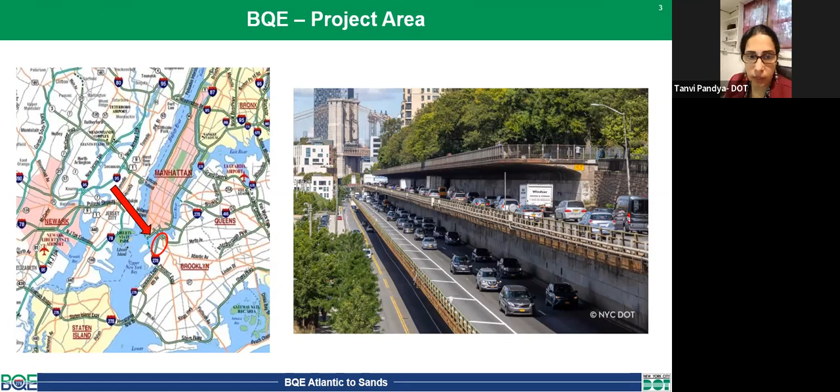We've met in the past. We've spoken several times about BQE in various forums. I think I've seen some of you before. So we're happy to restart the conversation. Like Julie said, for today, we're focusing on the immediate term work, specifically around this triple cantilever area.

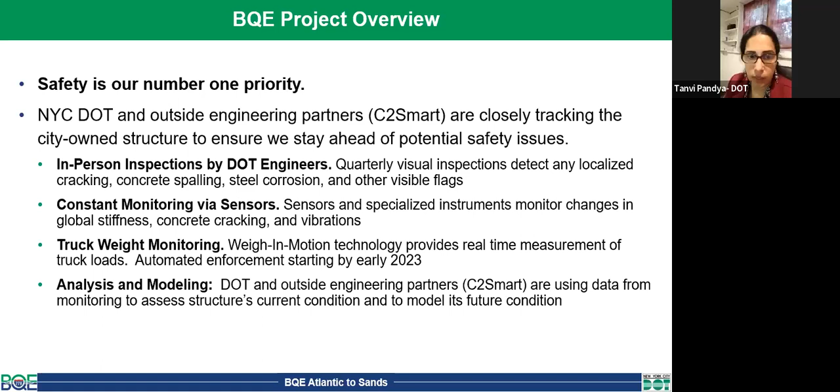While we've had a little bit of time that we haven't talked actively about the larger project, we have not been sitting back. Obviously, we've been keeping safety in mind. We've been monitoring the structure. We have quarterly walkthroughs done by our consulting team, including our in-house teams, to make sure we're keeping our eyes on the structure. When we identify any area that needs further investigation, we have follow-up effort that continues. We also have monitors that we've installed on the structure. And then on top of that, we have the WIM, the weigh in motion technology that was installed in 2019, which tells us exactly the kinds of loads that are on the structure.

So we take the data points. On one side, we have the condition of the structure and what it's able to carry. And on the other side, we have just how much weight we have. The combination of the two is what we look at to figure out the timeline for various repair work in the near term, and then setting the timeline for the longer term.

So we've also been partnered with C2 Smart, which is their academic... Tanvi, you're breaking up a little bit again. I can try coming back if you don't mind. Sure, why don't you do that? Okay. Sorry about this, folks. We'll be hopefully back online in a second.

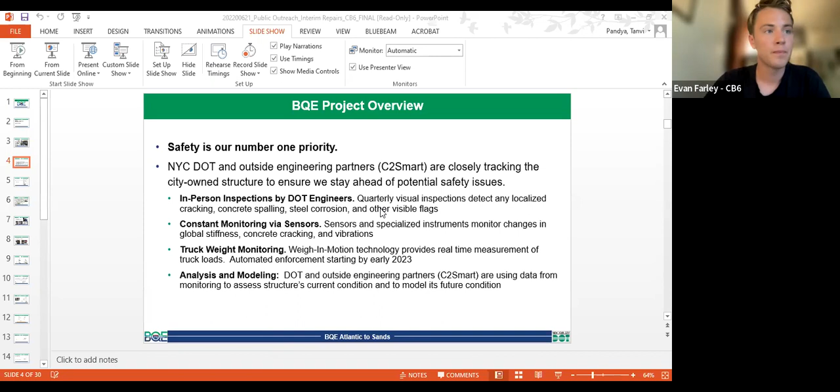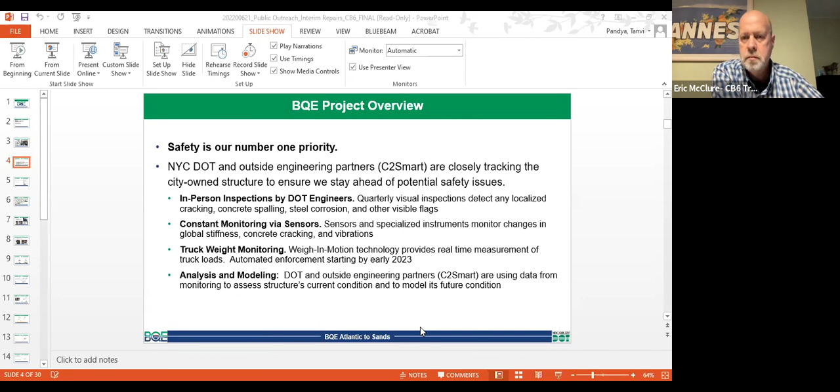Tanvi, do we have you back? Let's give her another minute, but then we might ask one of you guys to jump in. Yeah, it looks like she's joining by phone. If she can only do audio, I can share my screen and she can walk us through it. She's on the attendees, so she can't speak. If we can make her a panelist. I upgraded her, talking should be permitted, I think she's just muted now. If it's the 347 number. Yep. Tanvi, you're connected but muted on the phone. How about we go now? Hear me? Yes. Yep. Yes, great, sorry about that. Okay, back to the regularly scheduled program. Tanvi, if we have an issue? Okay, great, no it's sorted out. Okay, thanks everyone for your patience. Appreciate it.

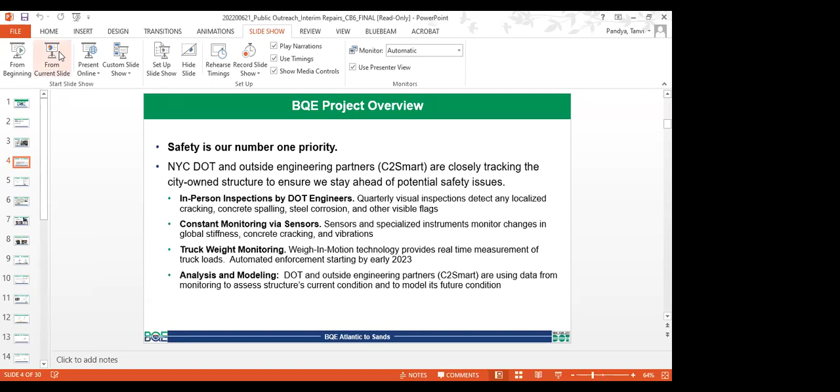Right, so we were talking about the truck monitoring that we've been doing. You've heard that we got the legislation approved, and we'll be looking to do automated enforcement in early 2023. In the meantime, we're doing the analysis and modeling that tells us where the structure is today and where it'll be down the line. We're partnered with the academic institutions of Rutgers and NYU, who are helping us think these things through using some cutting edge tools to do that.

Back in 2016, when we spoke about the condition of the structure, we said if by 2026 nothing is done, we would have to consider weight restrictions. We tried to identify what locations are causing that 2026 timeline to come up, and just like any chain is only as strong as the weakest link, we've now identified the two weakest links: near Clark Street on the Queensbound Roadway deck, and at Grace Court, also on the Queensbound Roadway.

In addition, underneath when you're driving along Furman, there's that vent structure for MTA that goes under the BQE, with an area inside that needs repairs. Since it's only accessible from the Queensbound roadway, while that roadway is closed for other repairs, we'll address that interior condition. Lastly, inside Joralemon, where those roll doors are, there's a structure we'd like to address as well. All of this work will come out as a combined contract later this year.

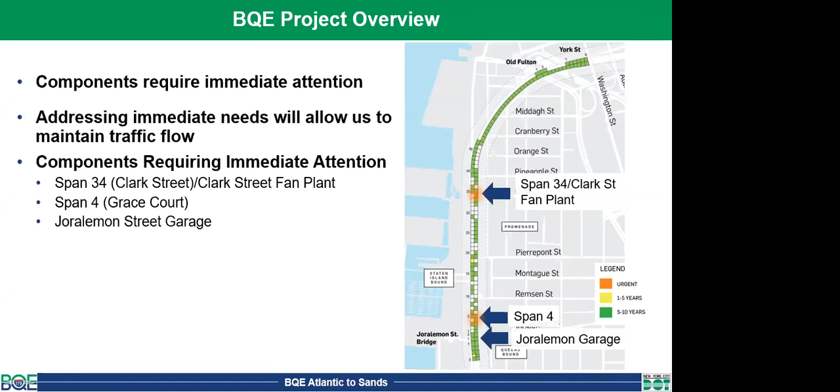So just looking at it from another direction, again nothing to do with the promenade, it's purely on the Queensbound roadway. The rough cross streets would be Clark and Grace.

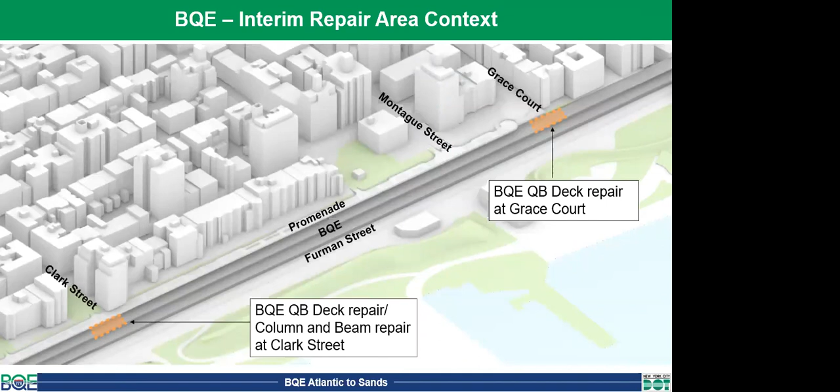This is something we have to work with MTA on. It has no impact on subway service or anything like that. It's simply that we're in the vicinity of their equipment, so we have to coordinate with them and make sure we do it in a way that doesn't disrupt anything.

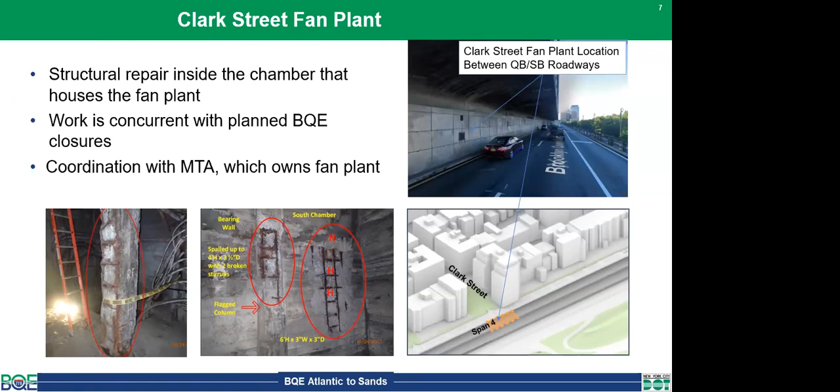And then this Joralemon work—the reason I'm focusing on these two tasks is that we're going to dig deeper into the deck repairs next. I wanted to get these two out of the way because they're relatively straightforward as far as the community is concerned. This work will be interior to this chamber you see, so there won't be too much visible outside, and it doesn't require any closures on the roadway. It's just work that needs to happen inside that structure.

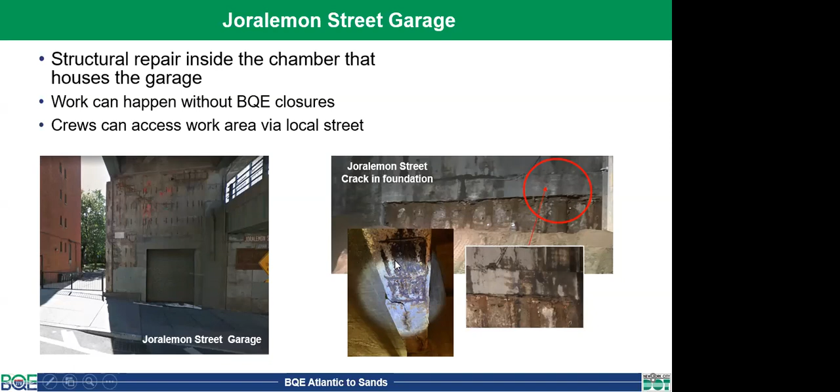There's a structure that has a crack we would like to repair, and some other beams that need to be repaired. So that's happening in the background.

The more important work that will be more visible and requires more traffic management is what's happening at the Queensbound roadway. Directly adjacent to the joints is where you can see it visually as you're driving by, where there's much more deteriorated concrete.

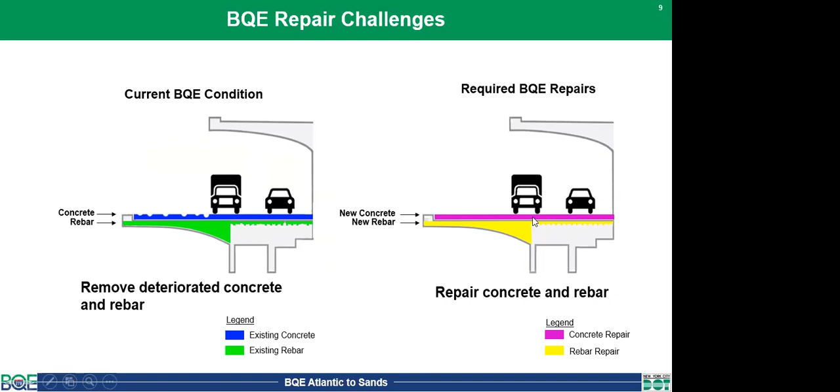Before we can do the repairs, we have to remove a lot of the concrete directly adjacent to the joint. Roughly 2 feet from the joint, there will be much heavier repair required. We remove this deteriorated concrete, then place new rebar to add strength to the area, and then place new concrete. That's the repair directly next to the joint.

As we go a little further in from the joints, the repair gets a bit shallower. We remove the upper level of concrete, replace it, add some rebar there as well to add to the capacity, and then pour concrete.

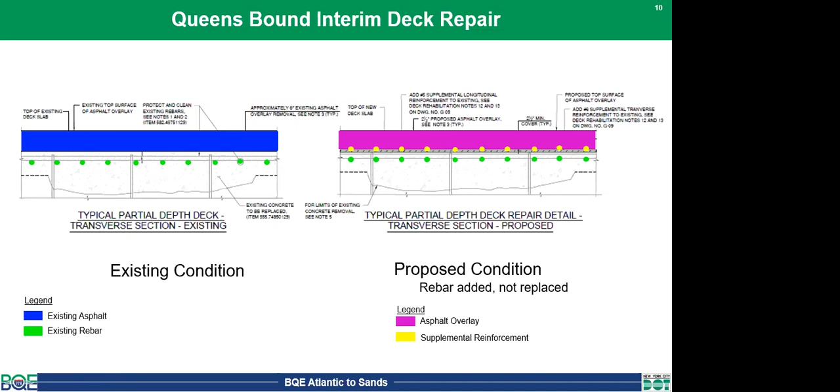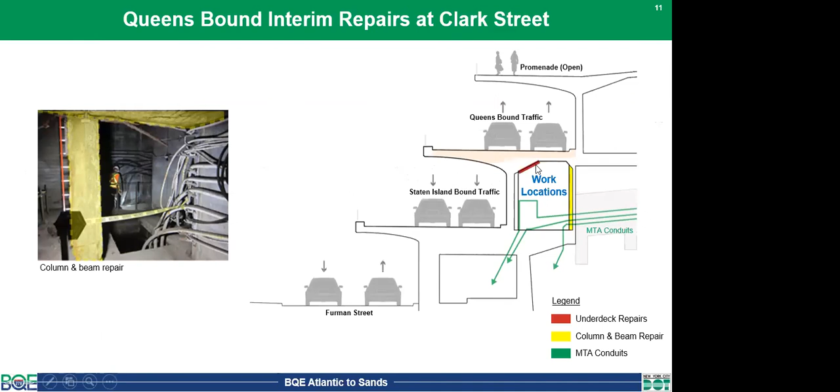As you might recall from past conversations, we need to work across all 3 lanes for this repair to really work. So when we come back to put this concrete back in is where we'll be looking for some closures. I'll walk through the closures in more detail, but while that work up above is happening on the deck, there will be work inside in this red area and the yellow column you see on the right.

The way the work is staged, there is a lot of prep work that needs to occur. There is demolition of the concrete that has to happen. This will occur during overnight hours, just like we do now, roughly from 1 a.m. to 5 a.m., then everything is back open. There will be overnight closures where work will occur. Plates will be put over the area under construction, and then we come back the following night and do it again.

When there is work underneath this cantilever portion, just to be safe and not put any traffic underneath live construction, we would likely close this lane as well. But it would be 1 lane in each direction at most during those overnight hours. The rest of the day, everything is back to the usual configuration.

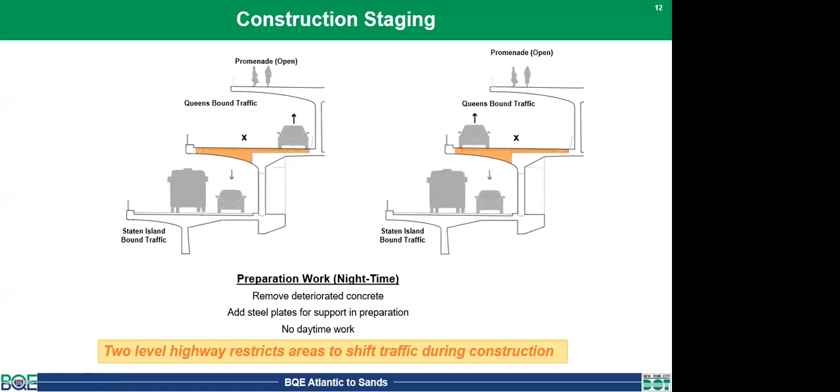After prep is complete, there will come a weekend where we are ready to put new concrete back, and that's when the first weekend closure will be necessary. This closure would be Saturday morning, 2 a.m. to Monday morning, 4 a.m., to allow us to place this concrete. When the concrete is wet, it needs to be held up by a support system sitting underneath it on the Staten Island bound roadway, which is why we're down to 1 lane in the Staten Island bound direction, with all lanes closed on the Queens bound roadway.

Once the concrete has cured sufficiently that we can remove this support structure, we will remove it. Staten Island bound roadway would then be open, and Queens bound roadway just needs sufficient concrete cure time for the repair to hold. So this is the window we'll be allowing the contractor to work in. Obviously we will encourage them to finish quicker and get out, but this is the window by permit that they will be allowed.

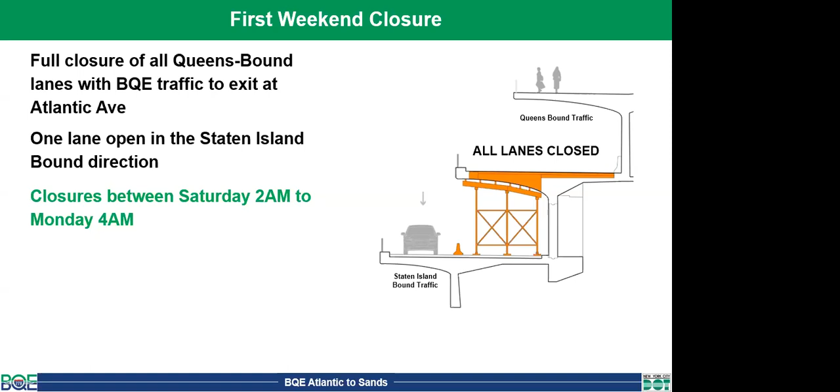After the work nearest to the joint is completed, for the subsequent 2 weekends there would be just prep. Then there will be another weekend where we do a pour, some more prep, and then the last weekend where we do a pour. Those subsequent 2 weekends we would only have Queens-bound roadway closure. Staten Island-bound would be completely open.

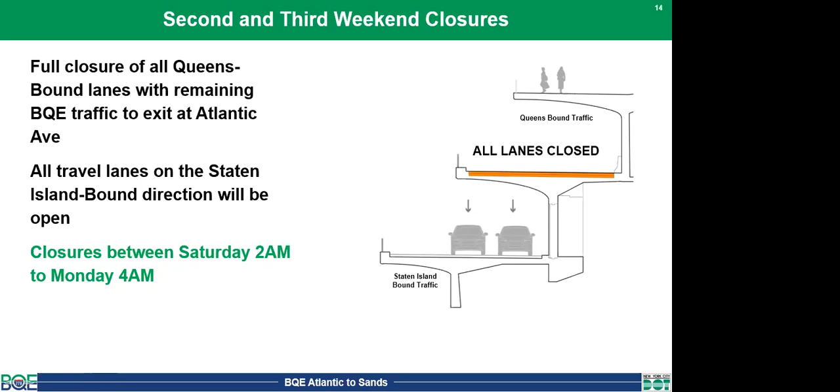These weekends are spread out over the construction season. We're very carefully trying to find the 3 weekends where there isn't any other major activity happening—no major holidays, no planned events, and so on. It's being very carefully thought through on how to do it to not have issues regionally, because anything that happens to BQE does tend to impact regional traffic, as well as greatly impacting local traffic. So this is the summary of the kinds of closures we're talking about: prep initially, first weekend closure, prep some more, second and third weekend similarly.

In order to achieve this, we have to close all of the entrance ramps where traffic is coming onto the Queens-bound roadway and send them on detours way outside of the downtown area and immediate vicinity, to avoid having a clogged up local network for the people that have to use that area. So we'll try to send the regional traffic completely away from the area, and then try to improve conditions for the local adjacent area.

This will take several traffic enforcement agents. We've been working closely with PD to make sure we have the number of agents we need. We'll also have many pedestrian managers, realizing that this is during the summer months where people are out and about, so we need to manage the pedestrians and keep them safe, as well as keep the traffic moving. There'll be message boards all over the place.

In addition, we are talking to our regional partners—New Jersey Transit, Turnpike Authority, Thruway Authority, Port Authority, MTA, and so on—to try to encourage the public well in advance to just avoid these weekends altogether for this area, and on that weekend, encouraging them to use alternate routes. We'll also do outreach to freight and try to work with them to avoid the area altogether. We'll also use the HOV configurations, the ones we have in the AM hours, to direct more traffic towards the Battery Tunnel rather than coming into the Brooklyn Bridge and Manhattan Bridge area. So there's been a ton of planning that has gone into this to try to minimize it to the extent feasible, understanding that any closures on BQE are obviously very disruptive to the neighborhood.

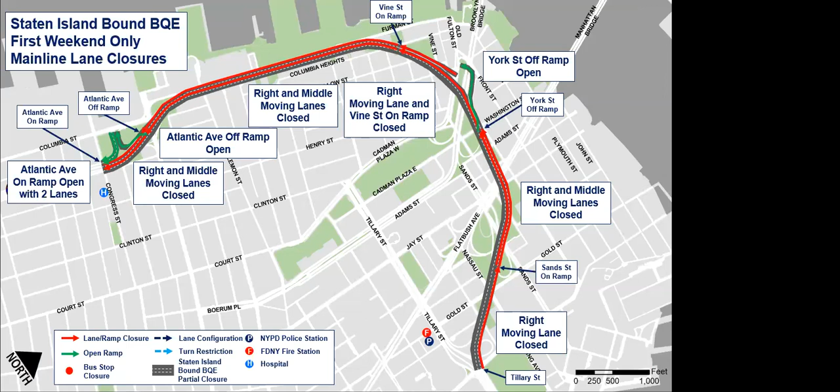So this is just sort of a close-up of all of the on and off ramps that are closed. Again, when we come back closer to the construction, we'll have more detailed information, and certainly different areas will need more details on different aspects. So this is sort of a high level of everything.

So in order to make this Staten Island bound detour work, Furman Street going towards Brooklyn Bridge is going to be closed. It'll be 2 lanes going towards Atlantic so that we can move most of that traffic through. That's one noticeable change that helps us keep the traffic moving. And this is why we'll have a lot of pedestrian managers in the area, because of the people coming in and out of the park.

And then there's a bunch of smaller turns that we have to modify to make sure traffic keeps moving. For the Queens-bound roadway, the closures are a little bit more extensive. The on-ramps are going to be closed further back to the south in order to reduce the amount of traffic that comes off at Atlantic, because anybody on that roadway at Atlantic has to get off.

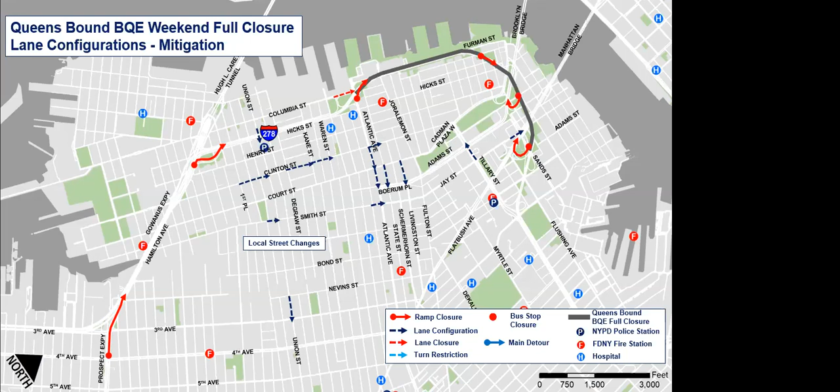So we'll try to encourage people to get to the signed detour routes well in advance and not come all the way to Atlantic and then try to find their way around. There will be some local street changes, knowing that some of the local traffic that comes off these streets around here has no option but to go through and will need to be managed. There will be some turns that are limited, some parking limited for the weekends to allow for storage as turns have to be managed. We're also going to be limiting some turns—certain left turns that tend to slow down everything.

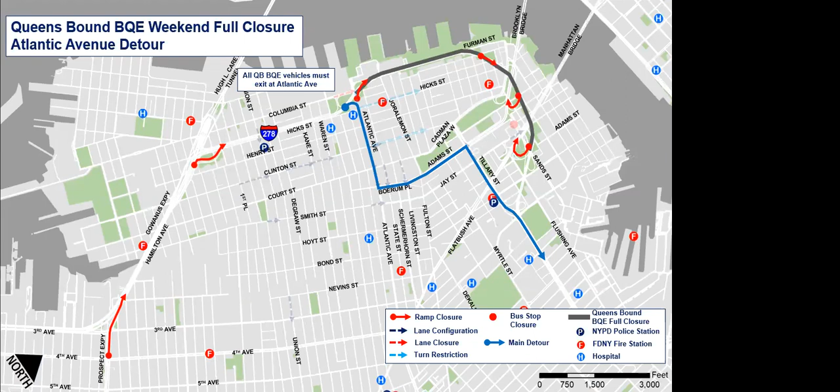So we'll be managing around those kinds of things and try to keep people on mapped routes. If someone came all the way to Atlantic and that's where they get out, we'll have to get them through Boerum to Tillery. But preferably, we will get them out of this area altogether, and they'll be coming along Third and then back on further down.

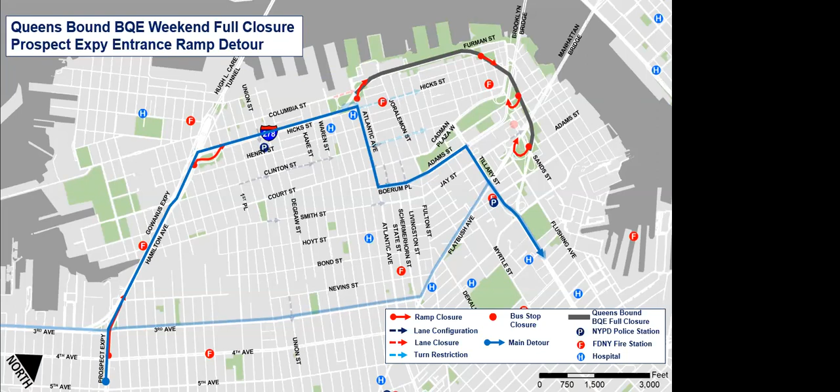And then again, there will be some that come from Prospect Expressway that we do have to manage through this area, and they would also be using the Boerum to Tillery. So these are the two marked detour routes that we'll be managing.

In addition, specifically for freight, these are some of the ramps that we're closing. For the freight, we are going to be encouraging them to use Linden Boulevard to go directly towards the airports, since at least some of them are headed that way, to try to keep them out of this area altogether. So that's one of the communications we'll be having with the freight industry.

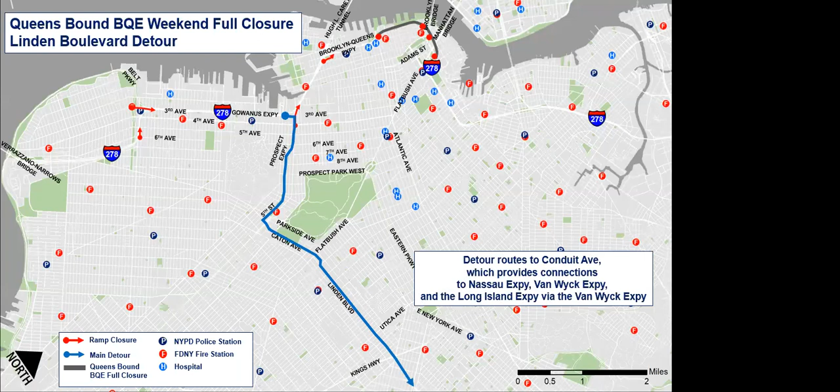And then, of course, if we are sending people to either Battery Tunnel or to Manhattan Bridge, we need to make sure that that traffic is able to get off and continue moving in Manhattan. Otherwise, everything backs up back into Brooklyn. So we're also making some modifications on the Manhattan side.

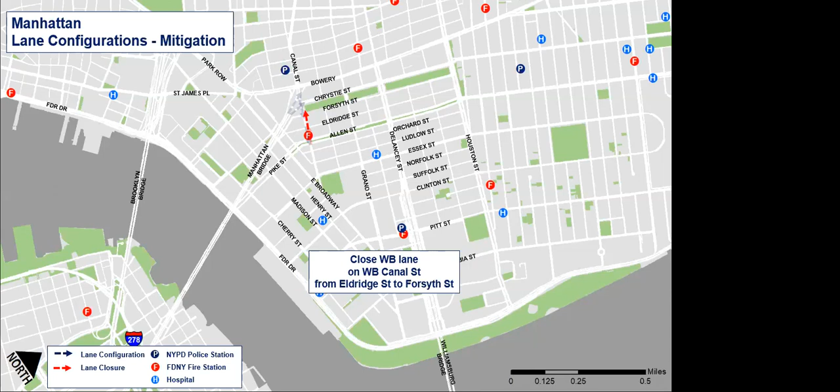And again, this is an area where we will have both TA and pedestrian management to make sure traffic taking Manhattan Bridge can get out. So people headed into Manhattan will be encouraged: if you're coming from the south, use the Battery Tunnel; if you're coming from the north, use the Manhattan Bridge and avoid this section of BQE.

So where we are in this process is we're just about finished with all of the contractual documents. We're looking to go to advertisement shortly to bring a contractor on board. And then there's some paperwork and registration involved, which will finish out towards the end of this year, and that's when the contractor will have the notice to proceed to get started.

And at that point, they have to give us an exact schedule of how they plan to proceed with this work. As soon as we have that, in early 2023 is when we will be able to come out and give you more specifics of which weekends we anticipate doing these closures. And then they'll be held to meet that schedule.

And obviously we have to keep in touch with you about the larger schedule, but we'll also have a specific community liaison who will have a phone available 24/7 throughout the construction duration to quickly respond to any issues.

The weekends that we do closures, we're going to have not only our people out there, we'll also have consultants who will be monitoring various areas and sharing that with our traffic management center that can give us directions if something needs to quickly change. And the contractor would also be able to implement those changes quickly if it's necessary. So there's a lot of that coordination that will be occurring during those weekends.

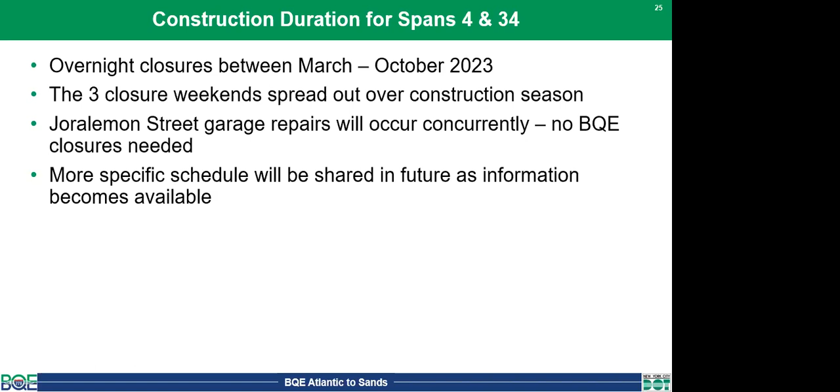And we'll identify who that point of contact is so that everybody can quickly reach someone if something comes up. So with that, I can take questions.

Tanvi, thanks. Karen, I know you posted a question in the chat. Tanvi, do you want to take that one first? And I'll just read it, Tanvi, in case you can't see the chat.

It says: it sounds good, but what are your plans to handle traffic if your encouragement just doesn't work? Tanvi, I think you spoke a little bit to this in showing the detours, but can you talk a little bit more about the traffic calming measures to actually direct people towards the detours?

Yes. So we will definitely have well-marked signs. We're also going to be working with some of these app-based direction services to let them know that they should only send people to the marked detours and not all over the place.

We'll also have a heavy presence of TEA agents, so they will redirect traffic if they are going down streets they shouldn't be going. We'll have them assisting. Plus, we'll work with PD so that we can quickly address if certain areas are really getting unnecessary traffic. Then we may have to have PD really step up. So we're working on all of that.

It is a concern for us as well, because we want to make sure that the local areas that are not supposed to have that kind of heavy traffic, we need to keep those areas safe and clear as well.